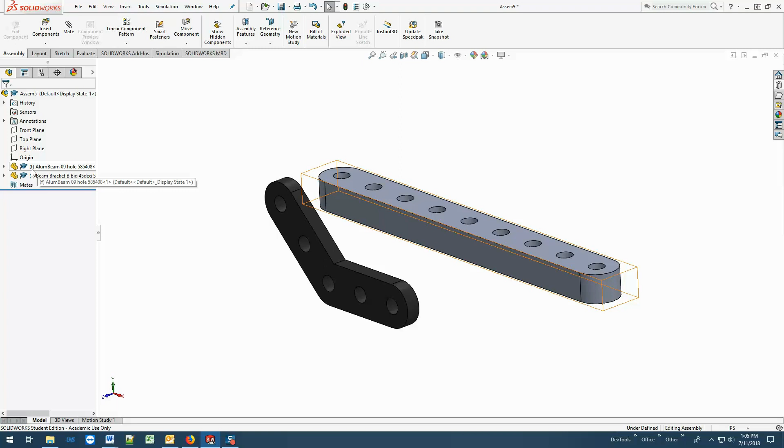However, if I try and grab a hold of the beam and move it, I immediately get that message. The selected component is fixed. It cannot be moved. So what this means is the first part that I drop into an assembly is labeled a fixed part, and SolidWorks denotes that over here in my assembly tree by placing an F in parentheses beside the part itself. You'll notice the dash beside the beam bracket, and that means it floats or it can be moved around.

So this does mean when we are starting an assembly, we should use a little bit of thought, try and figure out what is our base part, and add that first so that SolidWorks will automatically make that the fixed part. I can change what is fixed and floated inside of an assembly, but we will get to that later in our training.

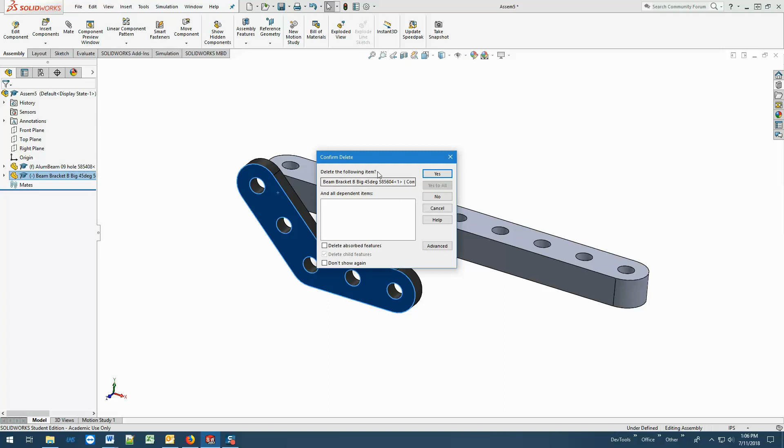Now, if for whatever reason I do not want a part that I've added into my assembly, it is as simple as clicking on the part and hitting the delete key, or right-clicking and selecting delete from the context menu. At that point, it will give me a confirmation dialog, and I can click on yes. But let's go back in, because we do want that part in there, and we do want it oriented this way. And let's continue.

Inside SolidWorks, a mate defines the relationship between two parts or components inside the assembly and how they interact with each other. So what we are going to do is to define a series of coincident mates between this bracket and our aluminum beam so that they are joined together in a manner that we looked at before.

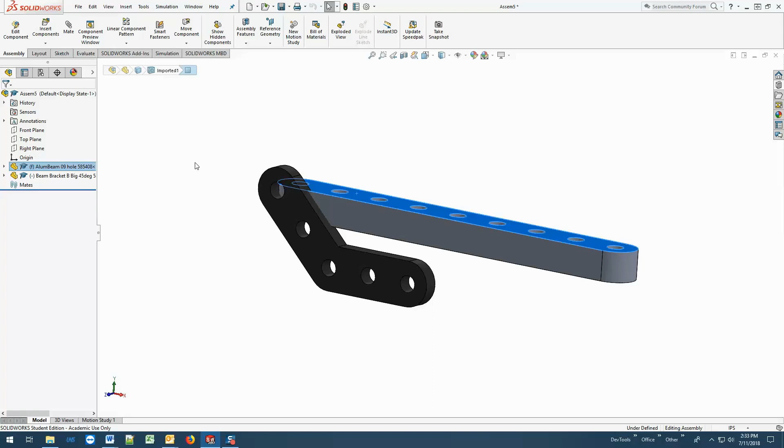So first thing we need to know is, how do we select various properties of our parts? So if you'll look, when we hover over top of a part, whatever feature we're hovered over top of gets an outline around it. And then when we click using the standard left click on a feature, that feature is now highlighted in blue. So we can select a face like I did here.

We can select a curved face. This is still a face. We can select an edge. We can select the edge of a cylinder. We can select the edge inside this elbow like this. So at any point, we can click on various features and select them. Why is this important? Because we will be selecting the features as part of our mating.

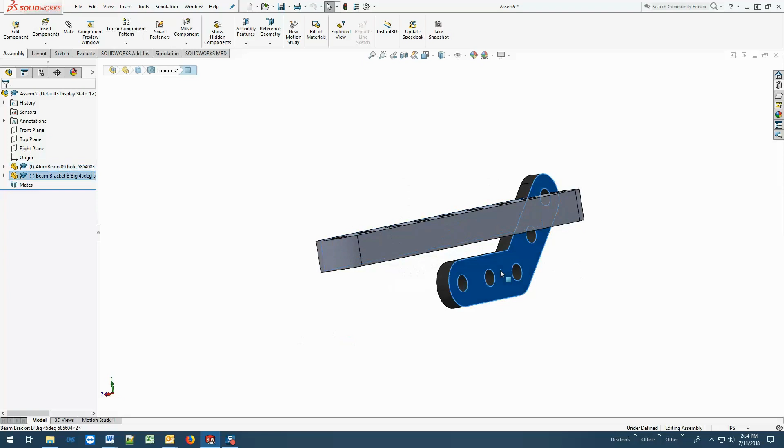So what we're going to do right now is to make it so that this face and this back face of our bracket are joined together. So we click on mate. I'm going to pre-select coincident as our mate type. When I click on this first face on the beam, you'll notice that a reference to that face comes over here in our mate selections box, and also that entire part becomes transparent.

Now I must select a feature on a different part in my assembly. So I'm going to come around again and select this back face of my bracket. Now a reference to that face has been added to my mate selections box. And when I click on OK, which is the green check box, that mate has now been defined.

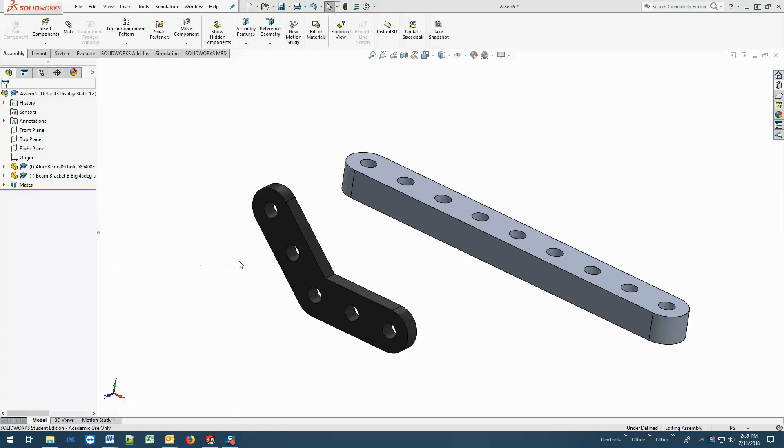Now that this mate is defined, I can still move my bracket around. I can slide it up and down. I can move it so that it's no longer touching this edge. But throughout all of that, those two pieces still have those faces sharing a plane. And that's what coincident means. Not that they're physically touching, but that the two features that were selected will now share a plane.

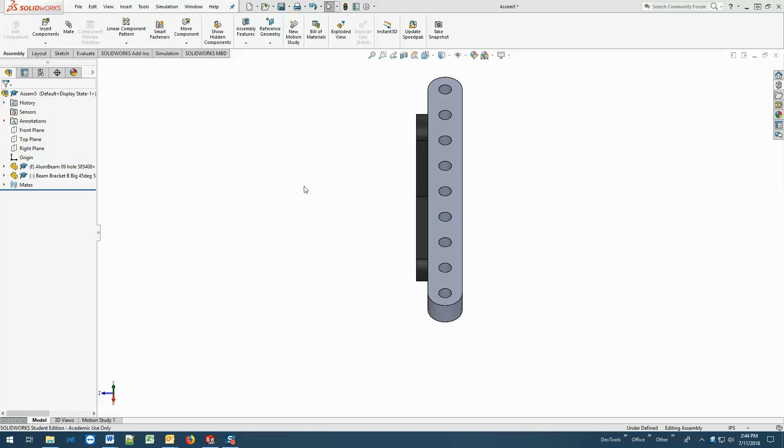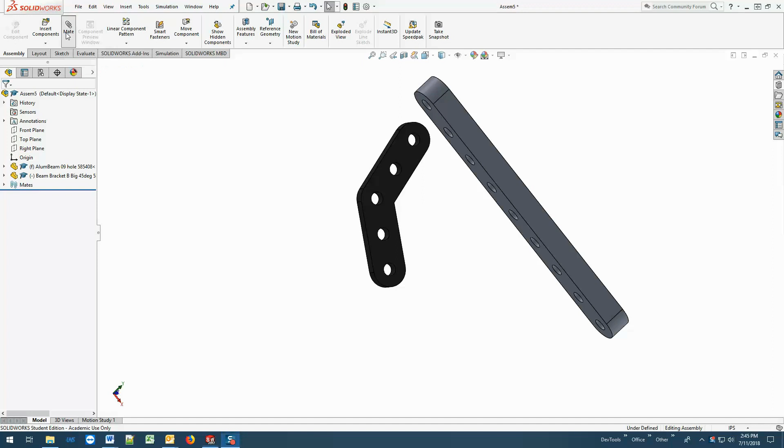Knowing that this bracket can still move around quite a bit, I know that I need more mates. So what we want to do is to line up this edge, this elbow edge, with the bottom face of our beam. So again, I'm going to go into the mate property pages, but this time, instead of selecting a face on my bracket, I will select this edge. I'm still going to be using the coincident mate though, and I'm going to select the bottom face of my beam.

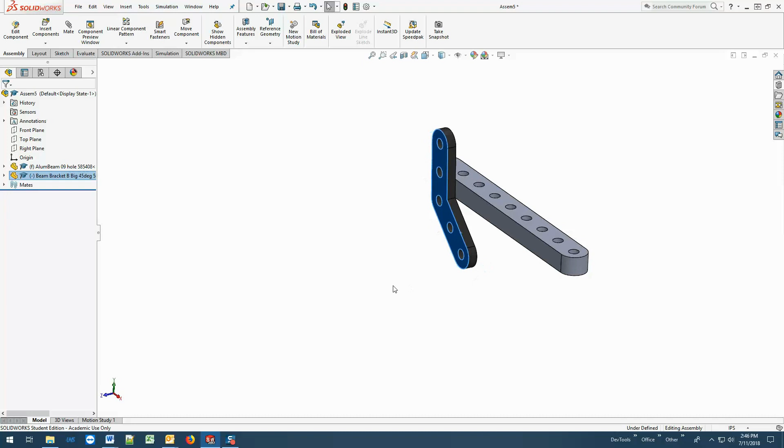Now when I click OK, those two are now lined up, sharing a plane. I can still rotate the bracket, but no matter what I do, those two relationships that I've defined between these two faces, and now this edge and the bottom face of my beam, those two relationships will never be broken.

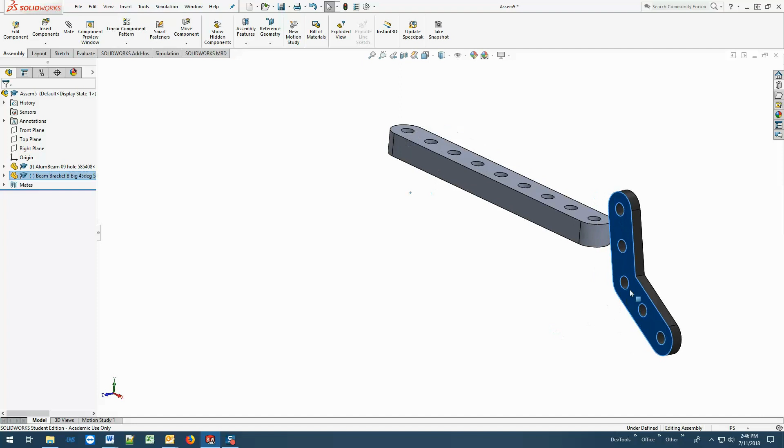Again, I can make it so that they're not touching. This edge still shares the same plane with the bottom of my beam, even though they're not actually physically touching. Physically touching is not a requirement for a coincident mate. The only thing that is required is that they will continue to share the same plane.

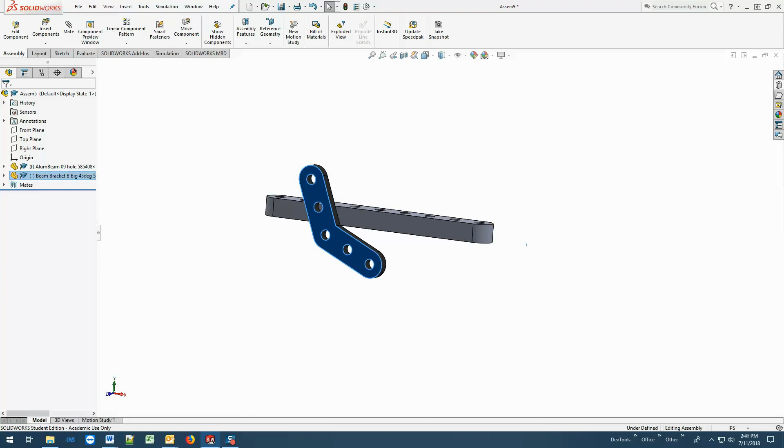Let's add one more mate. Let's put this edge coincident with the back face of our bracket. Select mate. Select this edge. And select this back face. Notice I did not select coincident, but now it is selected. SolidWorks saw the two features I had selected and chose the most likely of the mates that were available. So again, I'm going to click the green checkbox, and the assembly looks like the original thing we said we were trying to build.

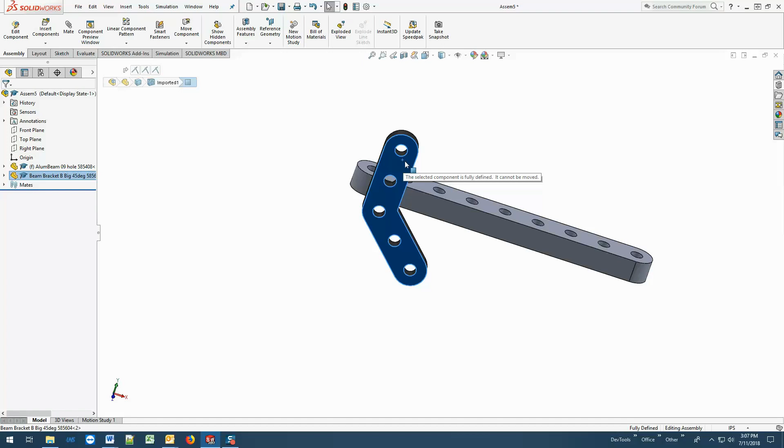Now, can I move that bracket? I try, and I get that message: the selected component is fully defined. It cannot be moved. So we know now we have a fully defined piece, or a fully defined assembly, in that these two pieces will be moved together.

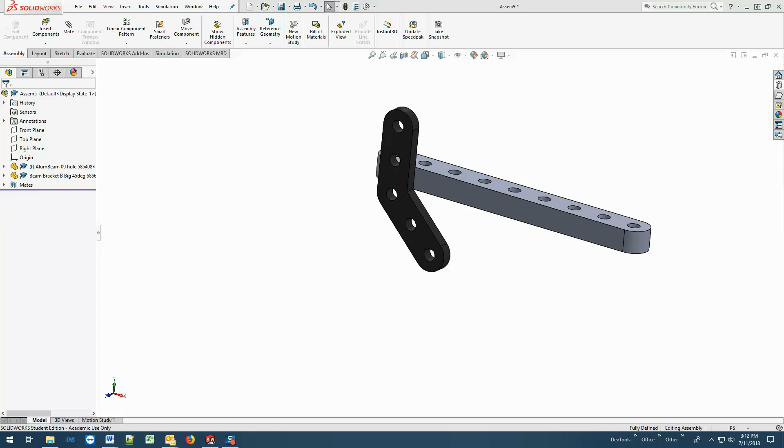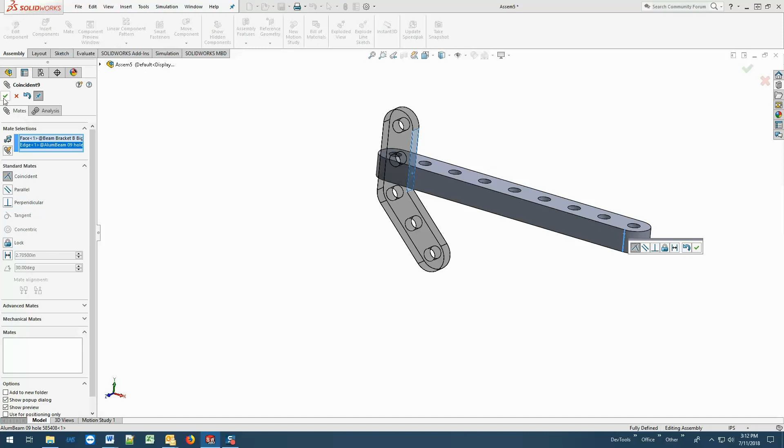An interesting question at this point is, what would happen if I tried to add an additional mate? So let's say I try and add a mate that would line up this face of my bracket with this edge of my beam. I'm going to select coincident mate and then select that edge. Notice it did not move to satisfy that mate like it did previously at this point. I click OK, and I'm now getting this message.

SolidWorks is basically telling me you've got an anomaly, or to make this happen, I'm going to have to break something else that you've told me to do. We can click on OK and allow this to go through, but at that point, SolidWorks will tell us about our errors until we resolve the conflict. So I'm going to cancel and leave things the way they are.

Now that we have those three mates defined in our assembly, we can actually find them in our design tree. So if you look at the bottom of the design tree, you'll see mates, and you'll see this triangle pointing in. That's an indication that, of course, this can be expanded. We click that and it points down now, and we can see the three mates that we have defined.

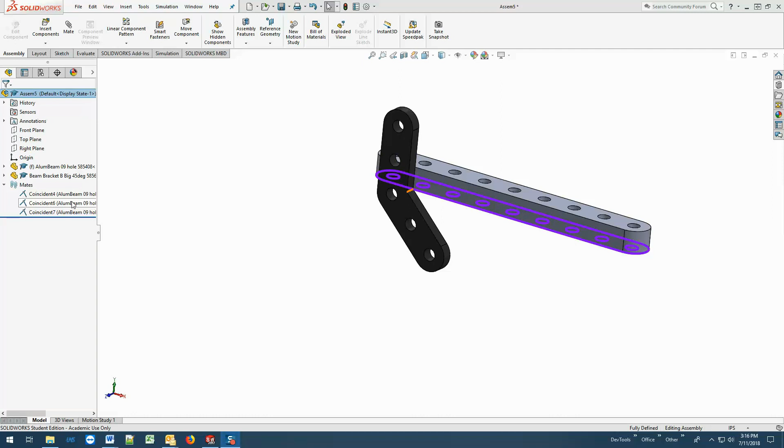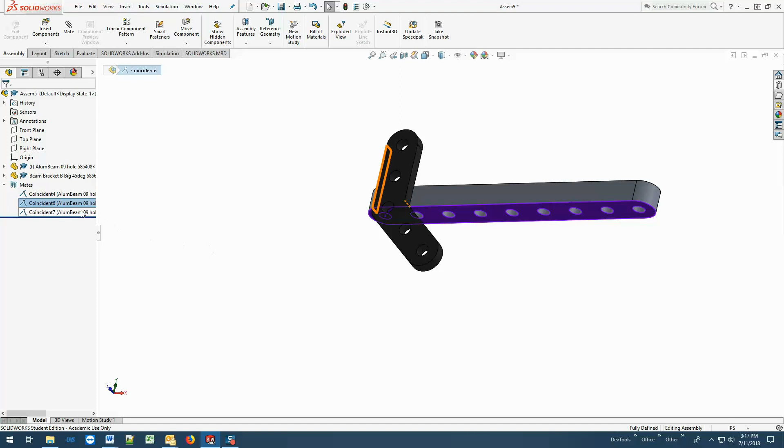If I hover over top of a mate, what you will see is in the 3D model, the two features that are used inside that mate are now highlighted. And if I click on it, it is highlighted a little bit differently. So that is an interesting way so that you can see what comprises your individual mates.

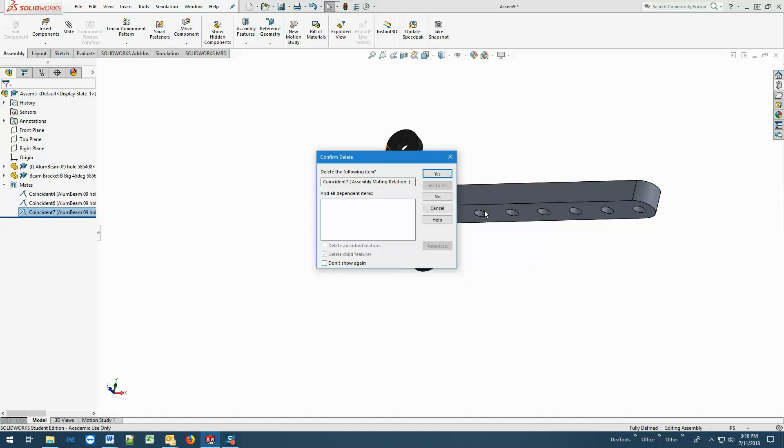Also, now that I have found these mates, I can easily delete one. So if I highlight the last one that we made, I can either click on my delete key on my keyboard, or I can right click on it, which will bring up this context menu, and I can click on the delete button. SolidWorks will give me a confirmation dialog. Now I'll say yes. Now I'm back to being able to move my beam around because that last mate is no longer active.

Let's define that mate that I couldn't define earlier, meaning this face with this edge. But we're going to do one thing a little bit differently this time. If I select this face first, then I click on mate, you'll notice that that face has already been pre-populated into my mate selections box. For some reason, I like to do this a lot. It just feels right to me.

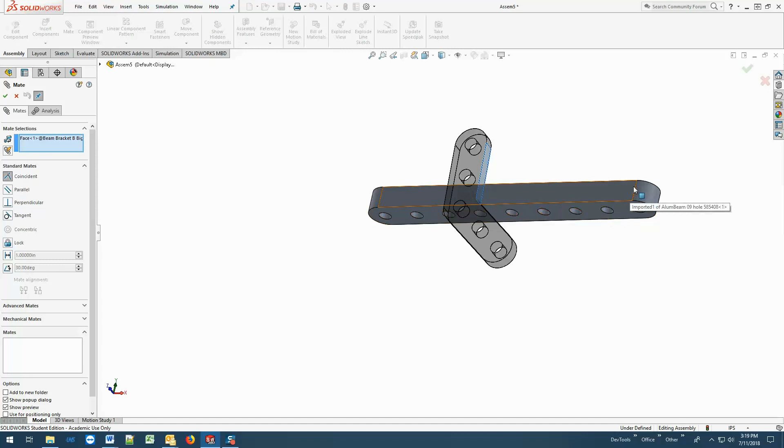So now I'll go in and select the coincident mate, select that edge, there we go, and hit the green OK. And again, I now have a fully defined part that cannot be moved. You might have noticed 3 is kind of a magic number. We have 3-dimensional space, and it usually takes 3 coincident mates to lock down a piece.

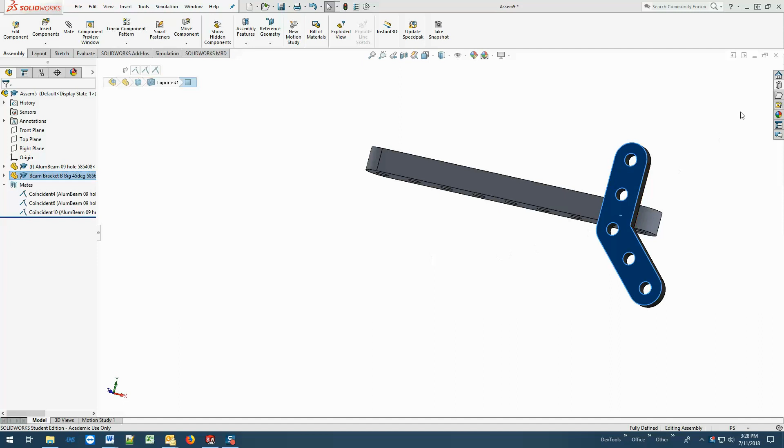If you have been following along in your own copy of SolidWorks, feel free to close this out and do not save this assembly. We will not be using it for any additional training.

At this point, I'd like to talk to you about the pin in the Property Manager. If I go in and create a new assembly, select a part, you'll see the Property Manager window is open over here. Once I drop the part, that disappears. That is something I can control to a certain extent.

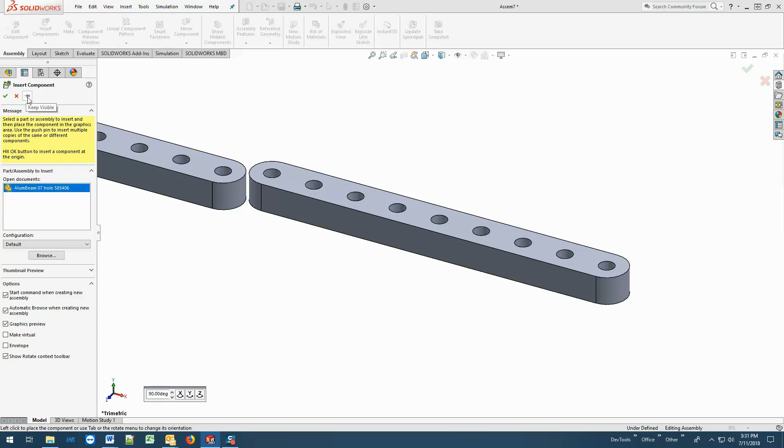If I bring up the Insert Components again, select a part, and click on this pin, you'll see this pin says Keep Visible. This is saying to keep this Property Manager window, Insert Component, keep it visible. So even when I drop a piece, it's still visible, and I can drop that same piece again.

I can go Browse, get a different piece, select that other piece and drop that instead. I can now click the green check or the red X to indicate I'm done. And honestly, at this point, it does not seem to matter. Either way, those parts that I've already dropped are in my assembly.

Unfortunately, SolidWorks does not remember that pin setting. I've brought up Insert Components again and selected a part, and you will see the pin is not selected, and I drop this part and my Property Manager page goes away. One additional interesting feature about this, and I'm going to delete all of my objects.

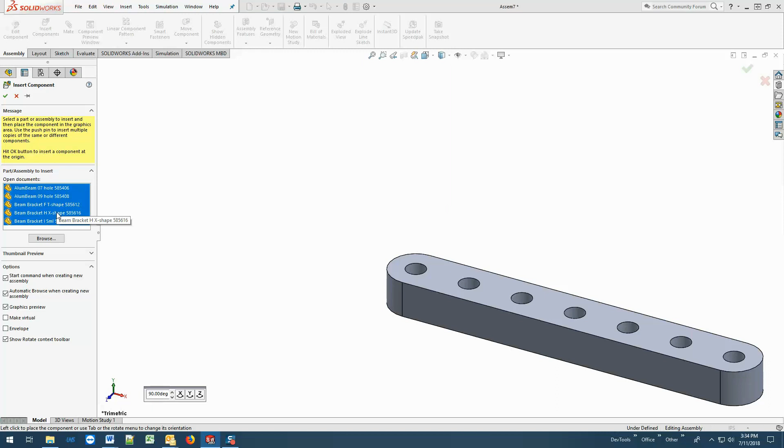If I go into Insert Components and I have multiple parts selected, and they're still all highlighted or selected over here in the Insert Component Property Manager page, it will allow me to drop each one of those in succession. And you can see my list is slowly shrinking as I drop each part. And then when I drop the last part, now that property manager will go away.

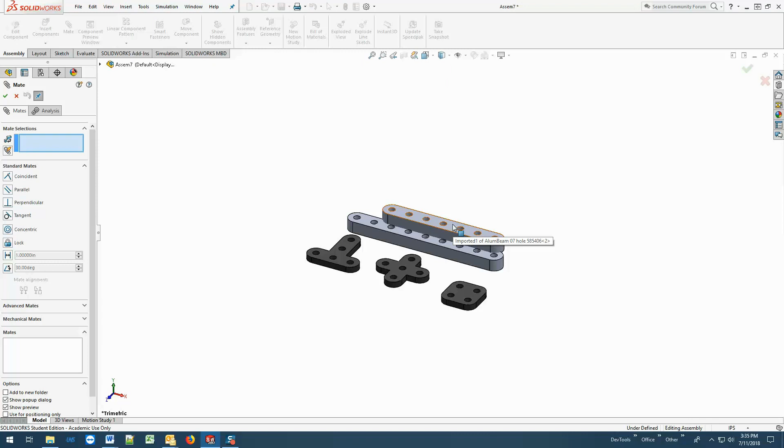On the other hand, when I select Mate, the Keep Visible pin for me was pressed by default upon installation, and I believe it will be that way for you too. And this one gets remembered. So right now, if I want to set up a mate between these two beams and save it, this stays active, so I can create a second mate and a third mate and a fourth mate and so on. And when I'm done, again, it does not matter whether I cancel or whether I click on OK. At this point, it will clear and the mates that I have created will still remain in the document.

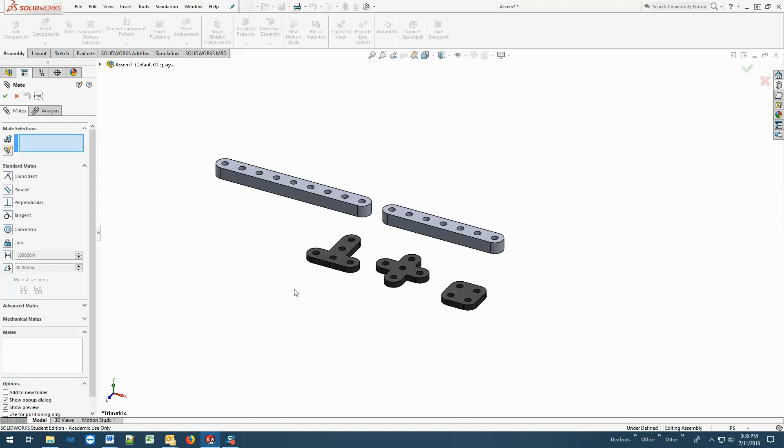So if I go into the mate and I click on that pin to uncheck it, create some mate, now that goes away as soon as I click the green OK, and the next time that I go into the mate, it is not pressed. The Keep Visible is not selected. So the mate, unlike my Insert Component, remembers my pin.

Coincident mates really are not going to get us very far. Most of what we want to do inside SolidWorks with our ServoCity parts will require us to line up screw holes. So for right now, we are going to bring in an aluminum beam 9-hole and a beam bracket type E, which is an L shape. We're going to bring in those.

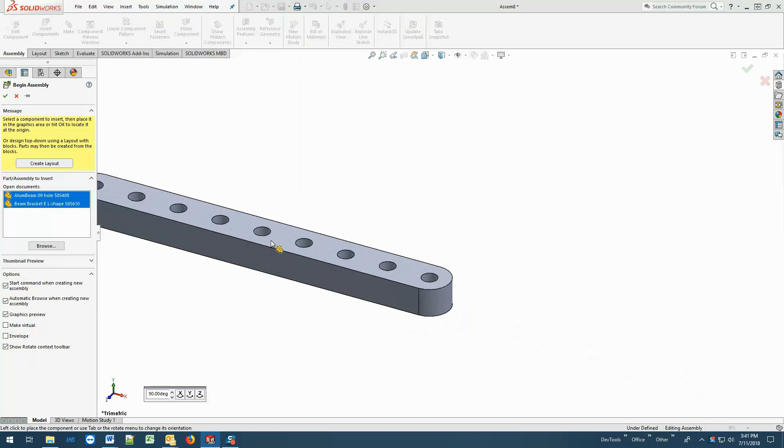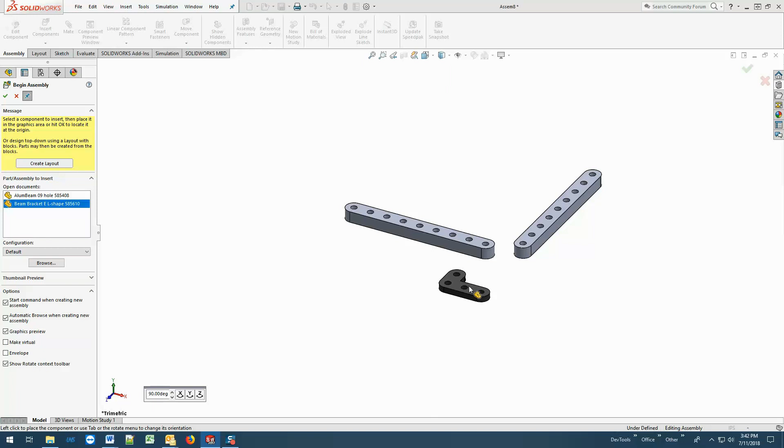I am going to pin this because we're going to lay down one beam this way. We're going to rotate around our y-axis and lay the second beam down perpendicular because we are going to attach them with our L bracket. So we want to rotate this. Let's see. So that it's that way. And do that again. And those are the components we're going to use for this assembly.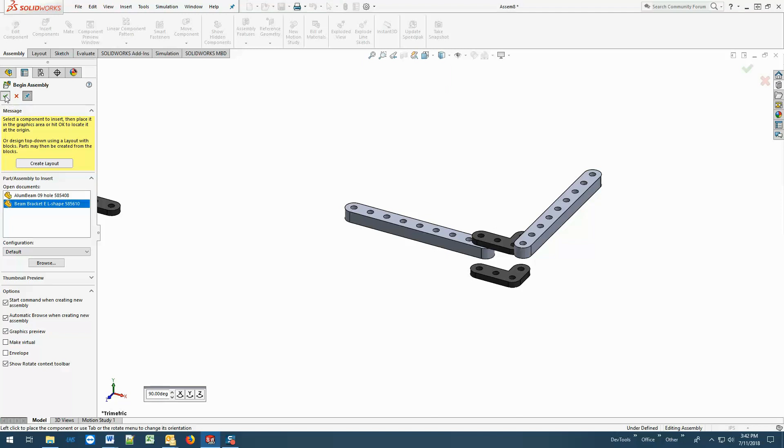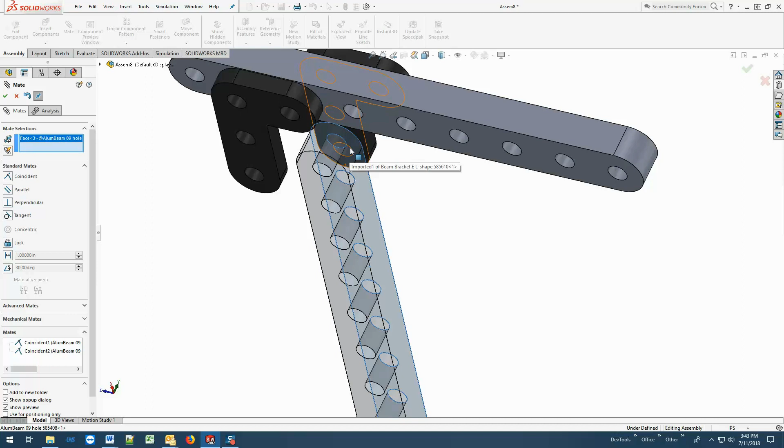Now we will start with our coincident mates because we know that when we use the screw holes and put these things together, we are going to be putting faces together at the same time. So let's go ahead and make our coincident mates that are needed. There's one, and I'm going to pin it because I'm going to make mate after mate after mate. And it should be 4 total. I can't get to the bottom of that beam. There we go. Okay, so now we have our coincident mates.

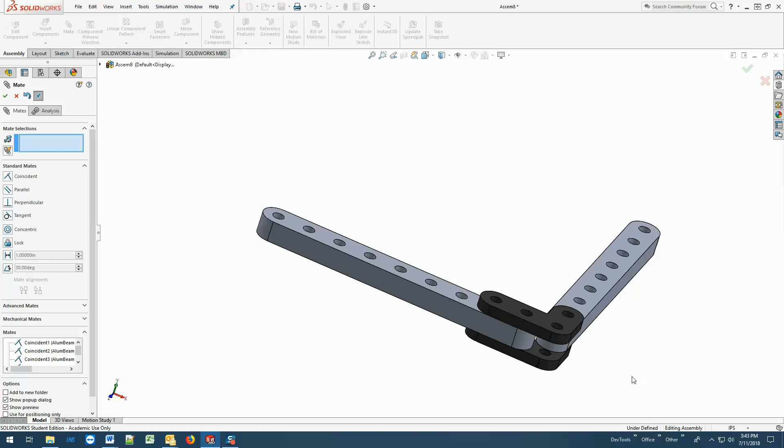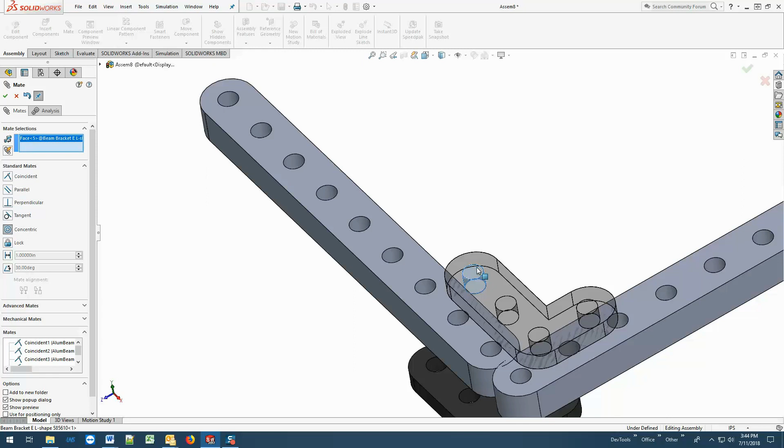But what we're really trying to do is to build this right here so that we've got our holes lined up. To line up holes inside SolidWorks is called the concentric mate. So if I select the concentric mate and then select a face, it's going to tell me the selected entity is not valid for the current mate type. That's a good thing, and we'll see more of that later. But I want to select this hole. I could have also selected the rim around the hole, but I'm actually selecting the inner face of the hole itself. And then saying OK.

Now, like we've done in the past, what does that mean and what does it not mean? Well, we've got these 2 faces with a coincident mate, and I've got this hole lined up with the concentric mate. But that's just one hole. Right now, this part will freely rotate around that hole. So again, a 3rd mate is required to lock down that part. So we'll go ahead and create another concentric mate. And now this part has been locked down. Select component is fully defined. It cannot be moved.

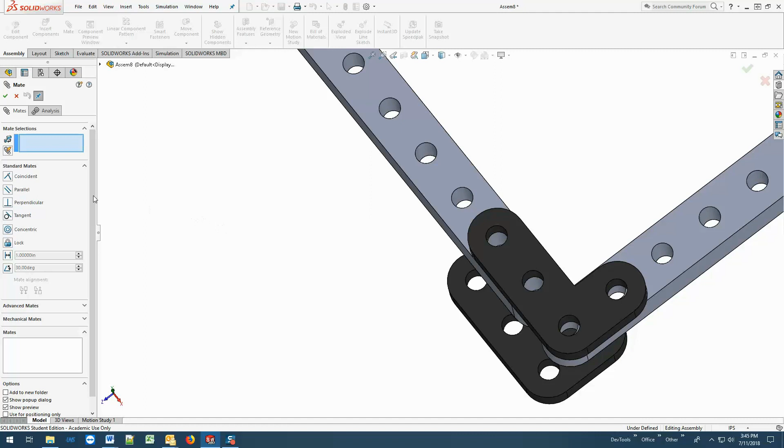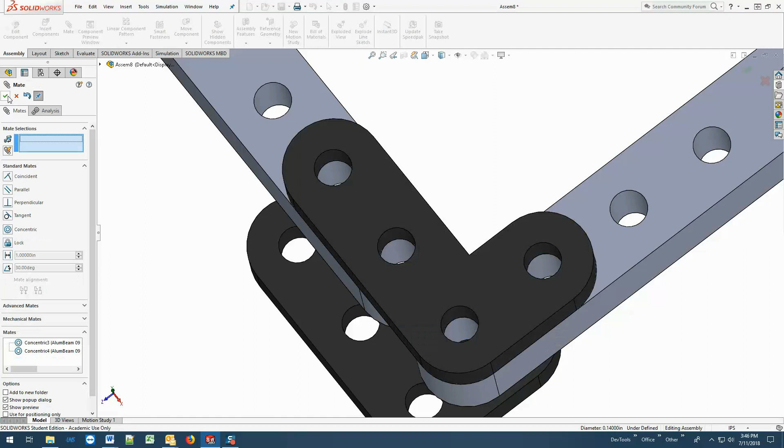Remember before, when I selected 2 faces, SolidWorks automatically selected the coincident mate. SolidWorks will do a similar thing if I select 2 circular components. So right now nothing is selected over here. I select my 2 faces and it lines them up and automatically selects the concentric mate. Now I'm going to flip my assembly over so that I can more easily get to the mates that are required for my other bracket.

One other thing I want you to notice is that when I have a fully defined mate, I have the checkbox over here, which is what I've been using this whole time. I've also got a green check here, Add Finish Mate, and a green checkbox over here in the upper right hand corner. Any one of those green checkboxes will do the same. In fact, the one that pops up right here is very close to the action and makes it very easy to find and get to. And I don't know why it didn't. It's wanting me to select the mate type.

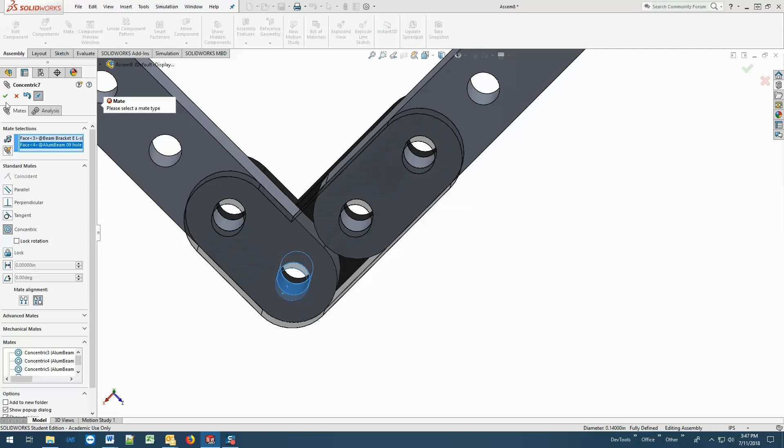Okay, so I now have my 2 beams held together by the 2 brackets. But there's no screws actually holding them together. It's only defined that way in SolidWorks. If I am doing some prototyping where I'm trying to prove out a concept, this is acceptable. But for a final design, we really need to make sure those screws are in place.

The most important reason being, if I'm going to have moving components on my robot, I may not allow for the clearance of those screws. This actually happened to us this past season during a design where we had a design in place and then had to modify the design on the fly because the screws were not defined in SolidWorks. So let's add the screws and the nuts to finish this up.

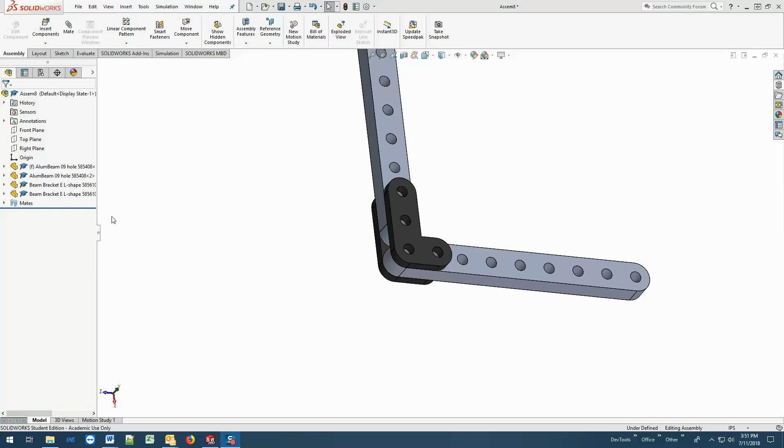So I'm going to go into Insert Components. My screws and my nuts are underneath machine screws. So I started typing in the word machine and it jumped to those parts in my file list. I'm looking for the 6-32. So this is a number 6 screw with 32 threads per inch. This is the nylock nut. So this is the nut that we're going to need. And I'm going to select I believe that's 5/16. No, a 5/8 length screw.

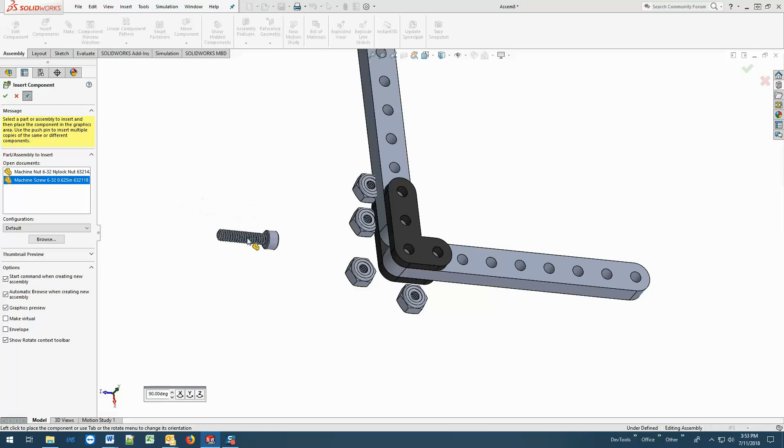So I am again going to keep this visible. I'm going to put my 4 nuts in place. And I'm just going to drop 1 screw in for right now. And I'll show you why in a few minutes. Now we're going to put all of our nuts along the top. And I want to show you a cool feature inside SolidWorks that makes this a lot easier.

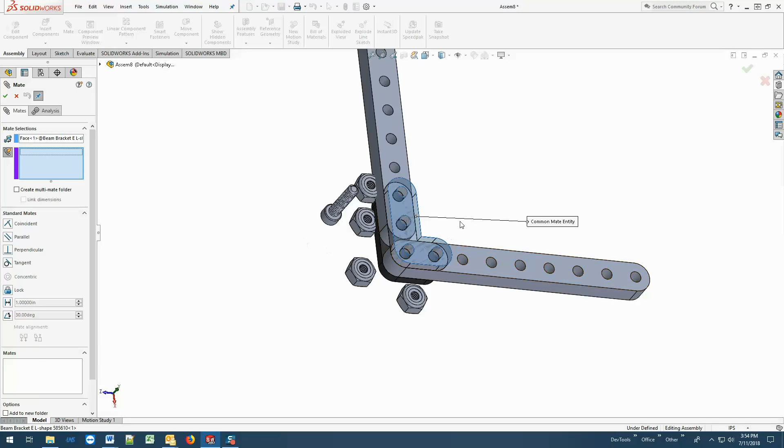Since all 4 of my nuts are all going to be lining up on the top of this beam bracket, I can select the beam bracket, the face that I want, and then click on this little lightning bolt paperclip, multi-mate mode. When I click on that, I have told SolidWorks I am going to mate multiple parts to this one common mate entity. So now that that's selected, I'll roll my assembly over so that I can see the bottoms of my nuts, and I will select this face on each one of them.

And just like that, all 4 of those mates are defined. You will notice down here, or even when I click the checkbox and open up my mates, that has created 4 separate mates for me. Now I will go through quickly and line up a concentric mate with this hole on each one of my nuts. So each nut will be on a separate hole.

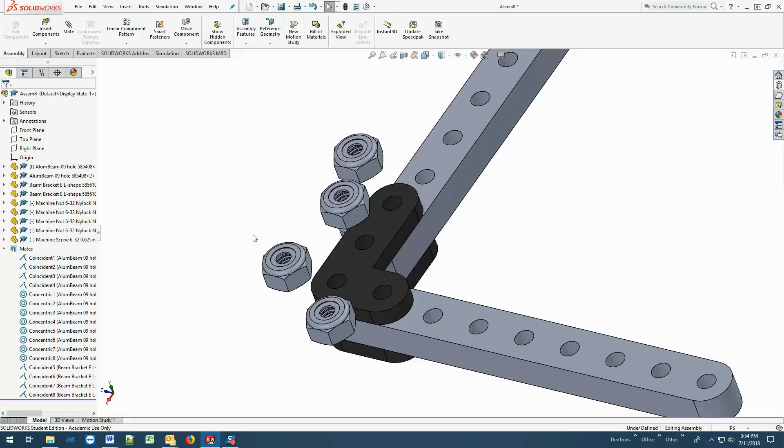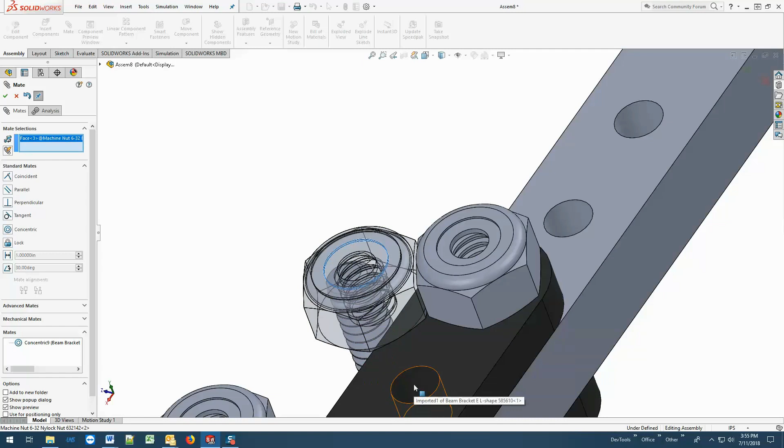It's really not all that important which circular face on the nut that you use, as long as you can find one. You can use this one on the inside there. That will line us up just fine. You can use this face right there. That lines us up just fine. So any of the circular parts on the nut that are circular to the middle of the nut will line us up properly. And that's done. Now we need to put our screws in place.

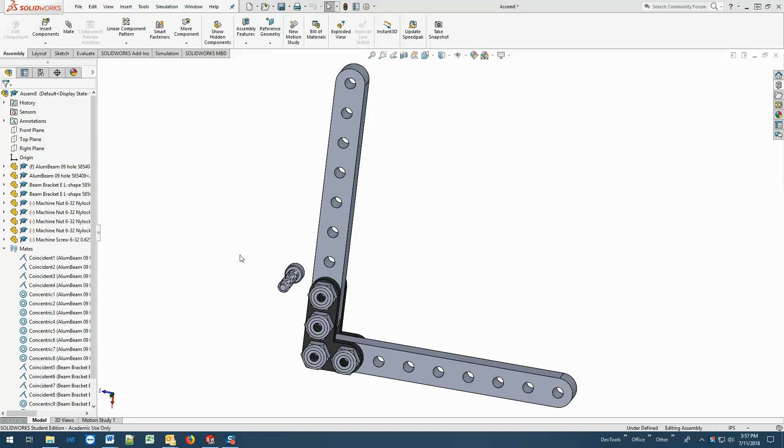Remember, I only brought 1 screw in here, and that was on purpose, because I wanted to show you that the 0.625 screw is too small. It does not go quite to the end. We can see here I've got it lined up. The shoulder of the screw is lined up with the bottom beam bracket, and the screw head just does not quite make it to the top of our nylock nut.

That's going to be a problem because the locking part of the nylock nut is right here at the end, and this just is not going to grab and give us a good lock. So we need to go grab some 0.75 inch screws instead. We'll select this, we'll delete it, and go into the insert components, go back into our machine screws, and find the 0.75 inch machine screw.

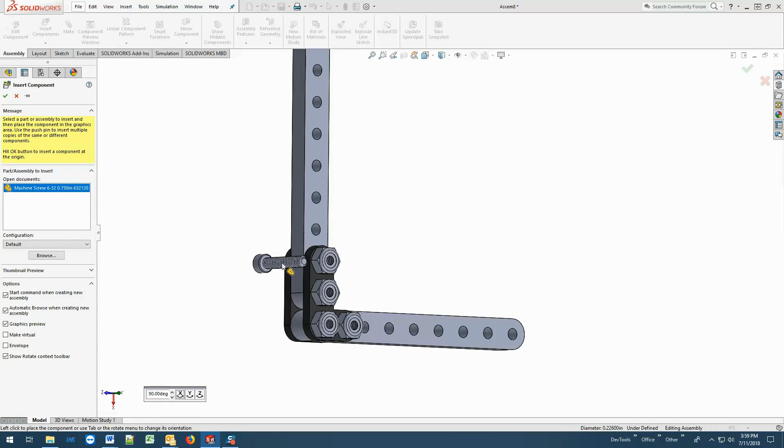Now you'll notice when I bring the machine screw in, obviously I have to go through some of the rotate in order to get this thing oriented correctly. And I'm having to click on that X 3 times. I'm just going to drop one screw in at this point instead of dropping in 4.

And now when I click on that part, Control C copies that part, and Control V will paste a new one in. Nice quick trick when you are dropping multiple parts in an orientation that requires you to use that rotate context menu. Just drop one in and then you can use the copy and paste. Again, that was select the component, use Control C to copy, and then Control V to place.

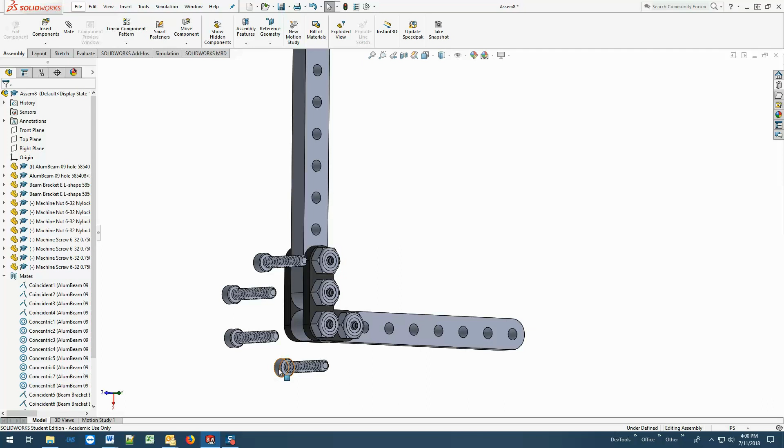And you'll notice when I did the Control V, I'm going to delete a few of these. I'll delete all the ones that I added. When I hit the Control V, it adds at the place where my mouse is at. So it kind of gives you an opportunity to spread them out or put them where they need to go.

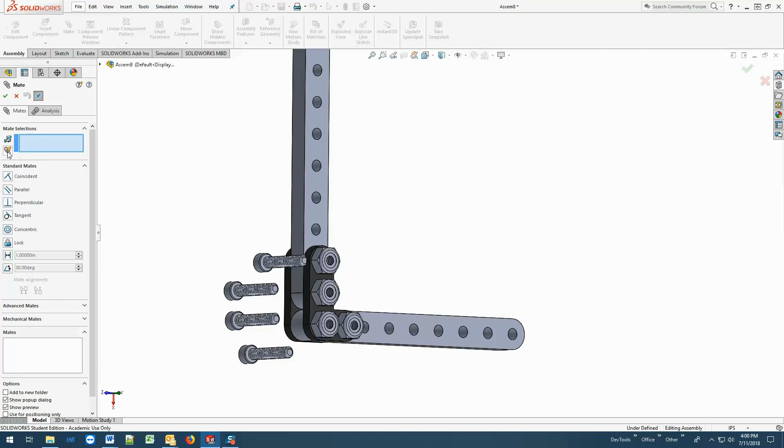Again, we're going to go into the mate and use the multi-mate mode. We want the shoulder of all of our screws, so this shoulder right there, to be lined up with this face of our bracket. So we select that first. We make sure that's up in the top, and that is our common mate entity. Then we will select the shoulder of each one of our screws.

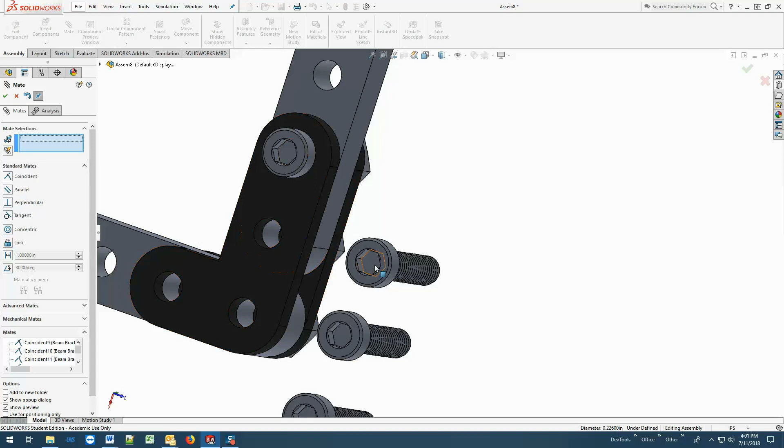Now that that is done, the easiest edge on our screw to get for that concentric mate is this outer edge right here. But notice I am still in multi-mate selection. I want to get back into single mate mode, so I click that again and that puts me back into single mate mode. Now I can select that circular face, that face, and get all of my screws in their final location.

And there we go. There you have it.

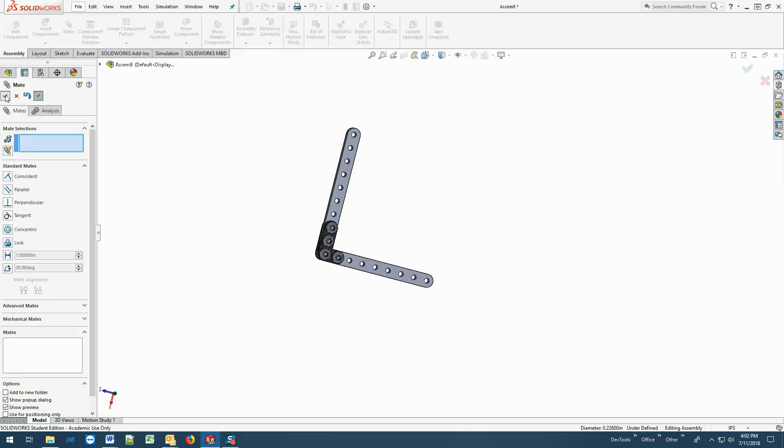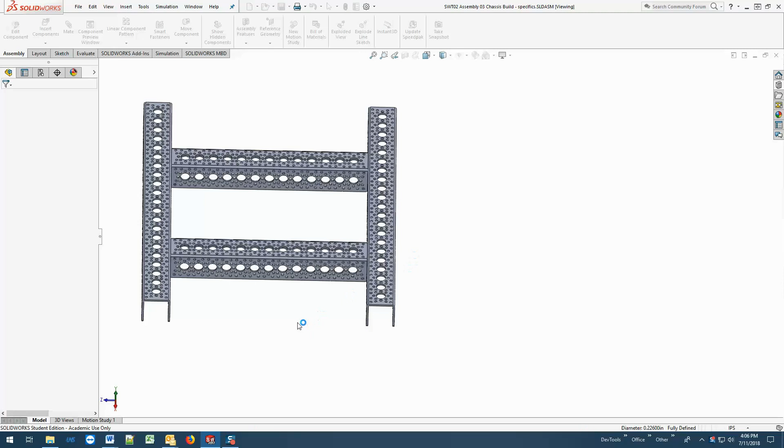Okay, let's give you a little bit of an assignment here, something that you can work on. I'm wanting you to build an assembly that looks like this. So this is very similar to the chassis that we used this past year for our robot Black Arrow. And I want you to put something like this together using screws and the brackets and everything that's necessary.

So let's look at what is required. What are the parts that you need? Here's those parts.

So this is a channel, 10.5 inch. That's the two that are in the middle are the channel 10.5 inch. The two on either side is the channel 16.5 inch. And these are pattern mounts. So I started them with the letters PM, and they are side tapped pattern mount type C. So PM side tapped pattern mount C.

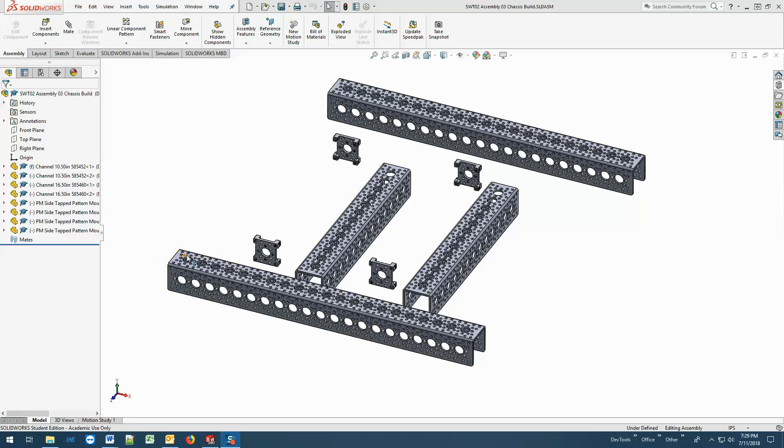So if we look closely at these pattern mounts, we're going to see that they have tapped holes. So the holes along the side, a lot of these holes on the face, they have threads. That means that we do not need to use nuts. We just need the screws to go into these threads.

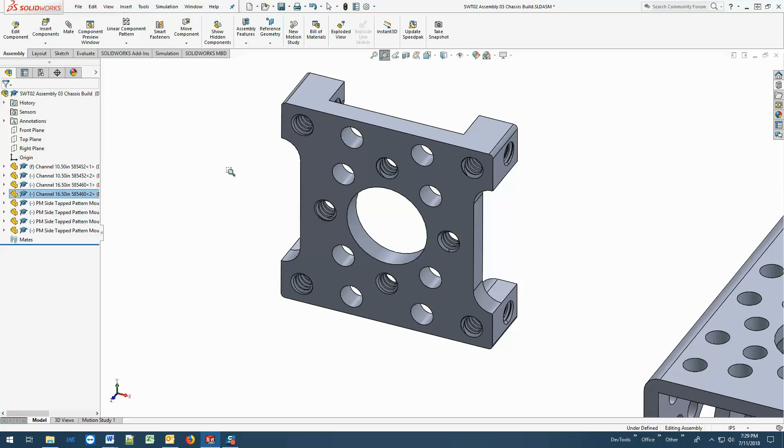It also, though, presents us with many different faces that we can select, or many different features we can select for the concentric mate. We do, however, have to be careful. There is one or two features inside that hole that if you try and select them, they will not make a good concentric mate. So let's at least start.

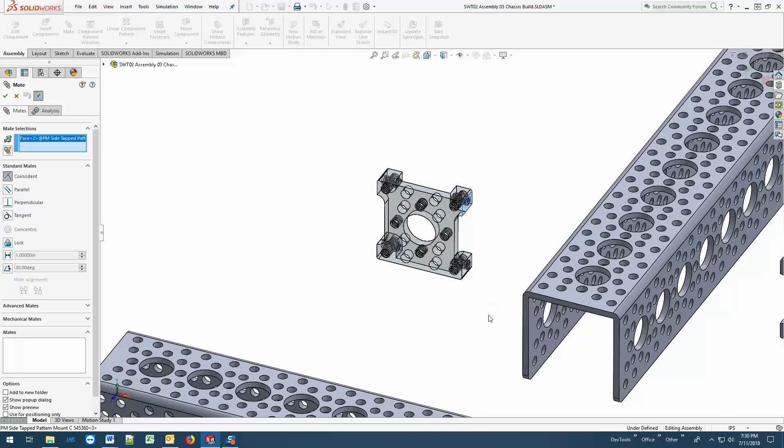We know that we are going to need a coincident mate with this face along the inside of the channel, or the opposite face on this side of the channel, one or the other. So I'm going to select that face there and the inside face of this channel, and that sets up that mate relation for us.

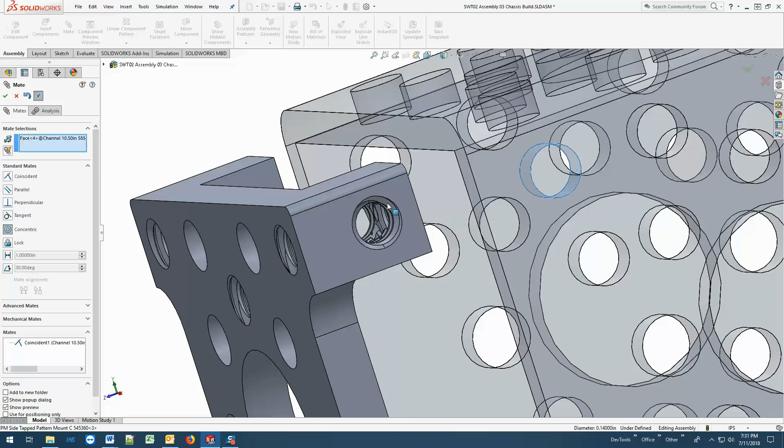Now at this point, I need this tapped hole to line up with this hole on my channel. So I suggest anytime you are working with tapped holes, make sure to select the concentric mate. If you select the concentric mate and then accidentally click on a bad face, it will tell you the selected entity is not valid. So you can say, oh, well, let me select this face instead, and you'll see that that's a good face for the concentric mate.

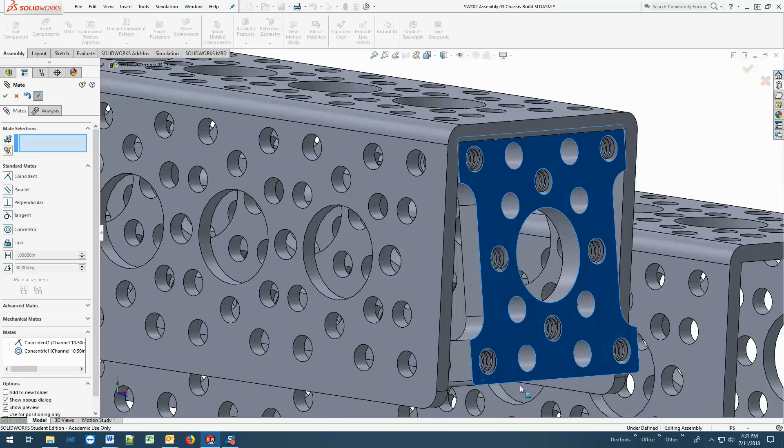At this point, I would also suggest, since we've just got one hole tied in, to make sure you do at least two holes and make sure they're opposite. You don't want two holes on the same side or at the top or bottom. I would suggest doing diagonal holes for your mates.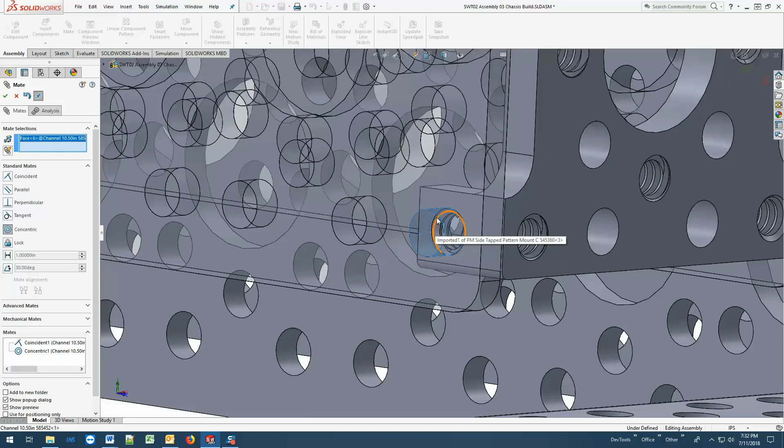Again, I'm going to select concentric to make sure I'm getting a good face. And voila.

Now, in order to build our chassis, I'd like you to bring the channel, or the cross channels, at 6 big holes in. So 1, 2, 3, 4, 5, 6. We want the channel to basically come in at this point, and that's going to be the front and the back too. So your other cross channel should be 6 big holes off of the other end.

So the process will be to make the coincident mate first.

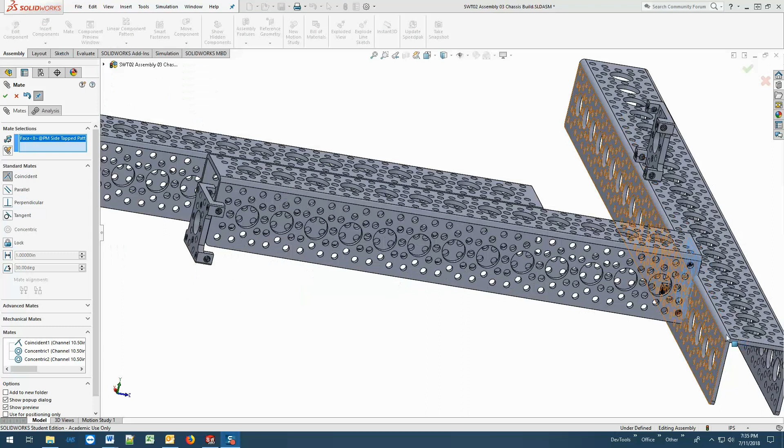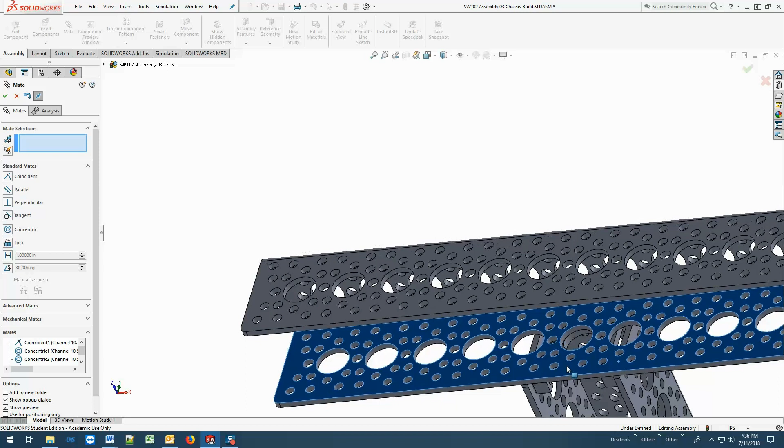Once that concentric mate is made, it becomes a little bit more difficult just because it's hard to see the holes on the inside of the channel. But you want to move your channel so that you're lined up 1, 2, 3, 4, 5 - and you can see I missed. Then try again to mate your channel holes to the tapped hole of the pattern mount.

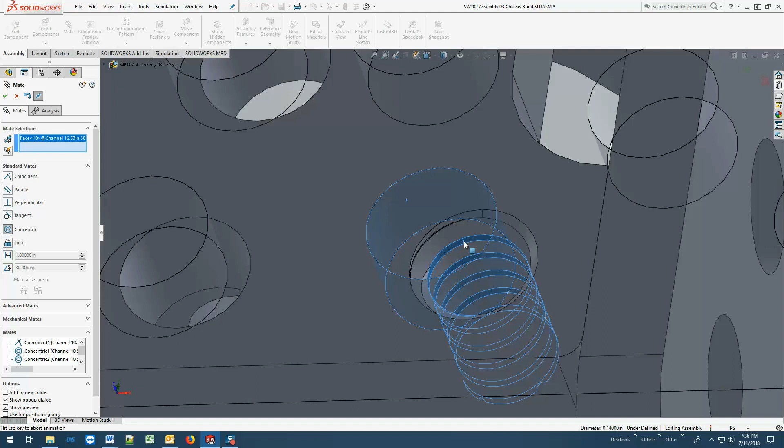So I've selected concentric mate, and now I can do this face, or even this long curly face on the inside. That's actually an acceptable face inside of a tapped hole as well.

So I'll do the 1, and again shooting for diagonals, I'm going to try and get this upper hole up here. Once I select it, I can see, since the channel becomes transparent now, I can actually see in and see the faces of the pattern mount.

And it is concentric. I did forget that time to select concentric, so I had to go back and double check and make sure that was the type of mate it gave me. And now I can click OK.

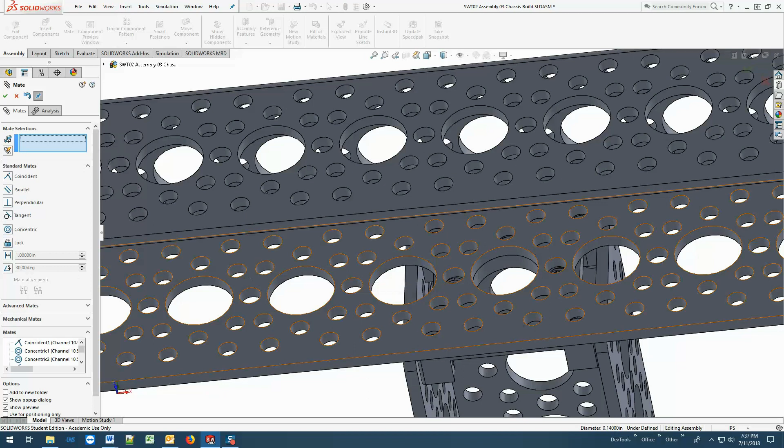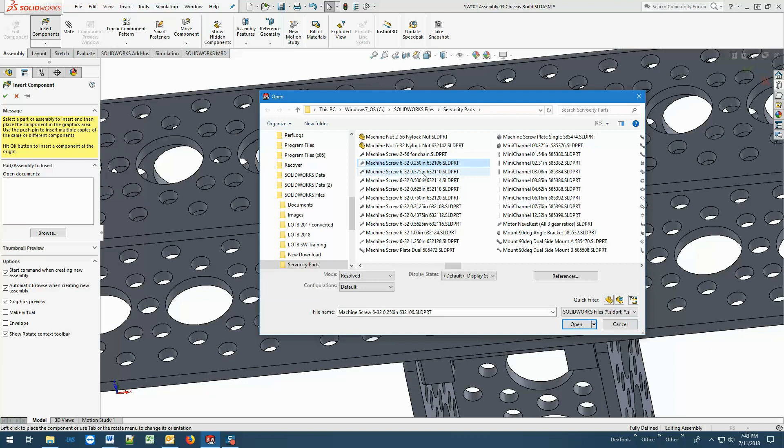Now I do want you to add the screws to this, but I'll help you by telling you which size we're grabbing. So I go into Insert Components and go into the machine screw area, and we're going to grab some 1/4 inch screws and some 0.375 screws.

So the 0.375 screws are specifically going into the side of these pattern mounts. So I'm going to orient that correctly for that.

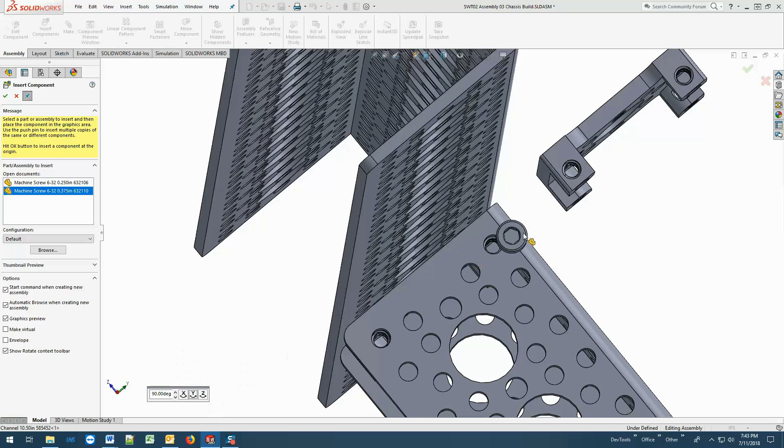And then the 1/4 inch screws are going to go from the inside of your channels into the face of the pattern mounts - so these screws here. Again, I'm going to use the Y to turn that and orient that correctly.

Now let me just show you by going ahead and completing the mates that are needed for this, lining up on this hole, and then lining up with that face of that channel on the shoulder of my screw.

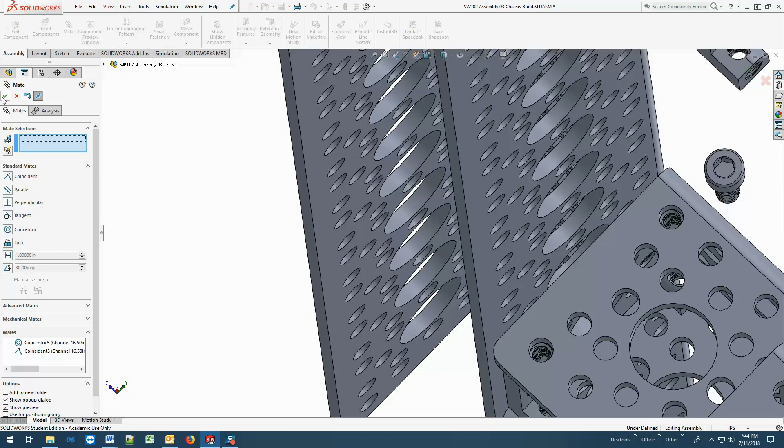Now once I do that, that screw is in there, and I can look inside this hole, and that screw is right there. That is the tip of the screw, and you can see that the threads are still available for another screw. This is what we did in practice in building this chassis.

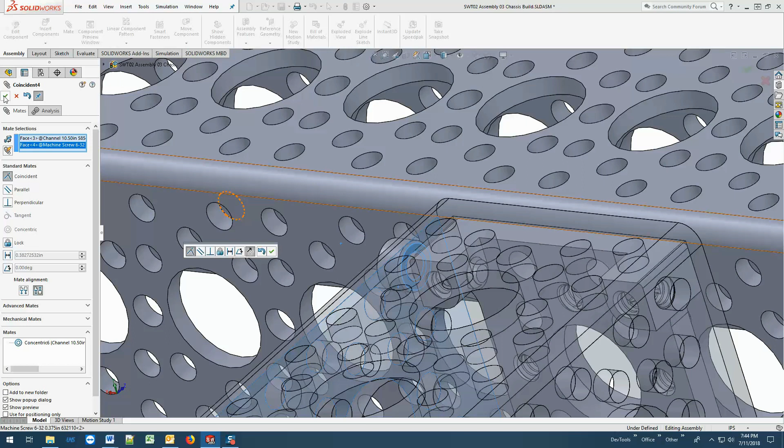So you will be using the 0.375 screws here on the sides, and of course I need to mate that shoulder. You'll be using 0.25 screws inside there. We want 1, 2, 3, 4 on the side, and we want 1 in each corner, so 4 on the inside as well.